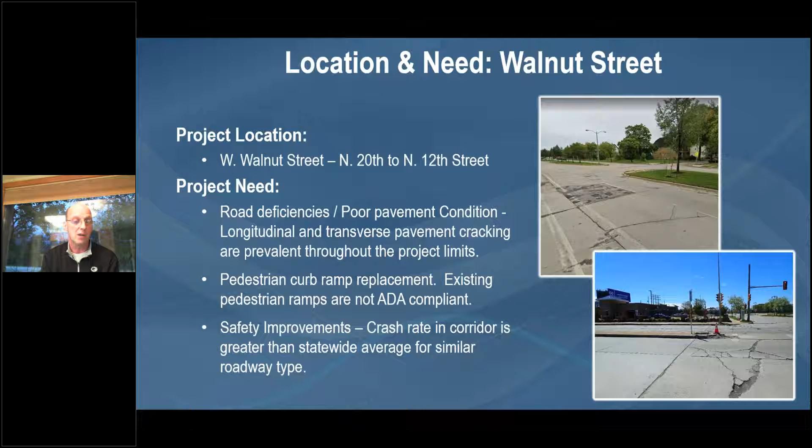One of the most important things about this project is incorporating some safety improvements. The crash rate in the corridor is greater than the statewide average for similar types of roadways.

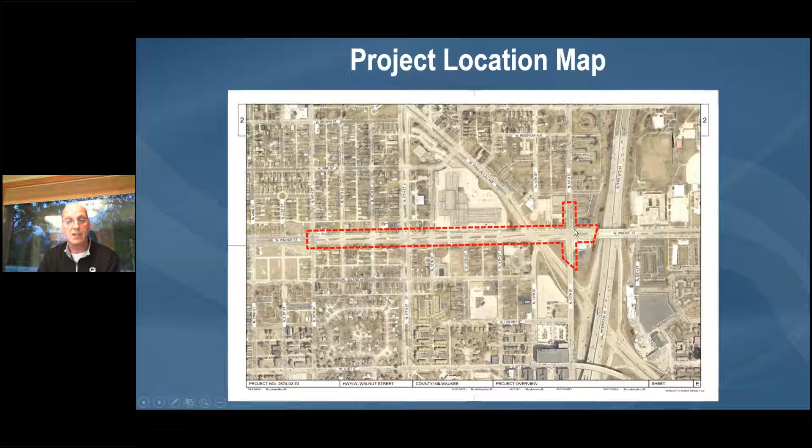The project location map here shows the limits. The project reconstruction is going to start on the east side of the 20th Street intersection and run east to the bridge over I-43. Primarily on the side roads, no improvements are being done - the roadway will be reconstructed to around the radius returns of those intersections. 12th Street, however, will have a portion reconstructed. On the south side of Walnut, it will extend down to the bridge that goes over West Fond du Lac Avenue. On the north side of Walnut along 12th Street, the project improvements will extend about 200 to 300 feet north to encompass the turn lanes at that signalized intersection.

I'd like to briefly go over some roadway data that's out there. The project length is about 0.6 miles, and the existing roadway is a 4-lane divided roadway with parking and bikes on both sides of the street. The roadway is classified as a minor arterial, which means it carries a decent amount of traffic. It has a posted speed limit of 30 miles an hour, and the traffic volumes vary. West of Fond du Lac, the traffic volumes are 12,600 vehicles per day, increasing to 16,300 vehicles per day east of Fond du Lac Avenue.

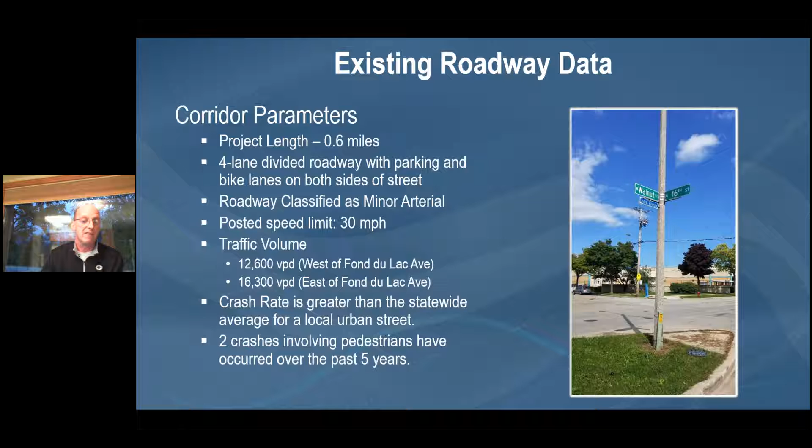As I mentioned, safety is a big concern of the city. The crash rate out there is greater than the statewide average, and there have been some crashes that have involved pedestrians over the past 5 years.

Graphically, this is what the existing typical section looks like. As you can see, we have two 11-foot lanes of through traffic in each direction, with a 5-foot striped bike lane and 7-foot parking lanes on both sides of the street. The two directions are separated by a 26-foot wide median, and we have 8 to 10-foot grass terraces between the outside of the road to the existing sidewalk.

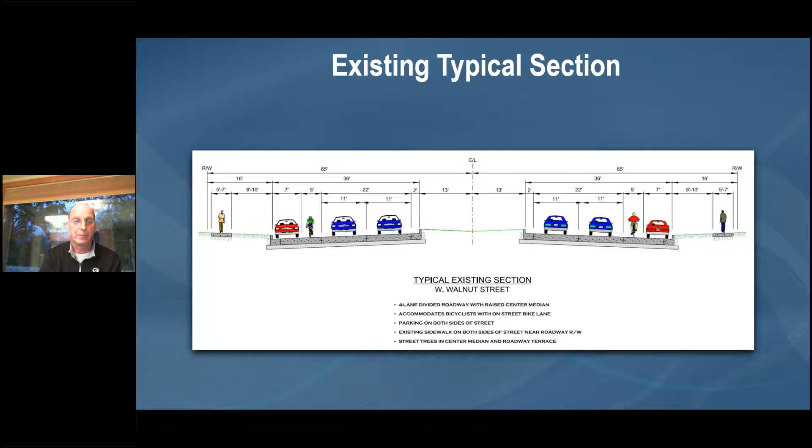Some of the proposed improvements for this project will include the complete reconstruction of the roadway. The city currently proposes to reconstruct Walnut as a 2-lane divided roadway west of Fond du Lac Avenue and maintain the 4-lane divided section east of Fond du Lac Avenue. This is directly related to the traffic volumes experienced out there today and forecasted for the future. As mentioned, we'll replace some pedestrian curb ramps and perform spot sidewalk improvements.

Any sidewalk that is damaged or faulted will be improved as part of this project. In a couple of the later slides, we are proposing to close some mid-block median closures, primarily at the alleys. This will also increase safety by reducing the number of access points within the project corridor. Other improvements include new signing, pavement marking, and street lighting.

Traffic signals will be replaced at 3 intersections, as shown here on that slide. As far as storm sewer, the trunk line, or storm sewer main line, is proposed to remain in place. However, we will be replacing the storm sewer inlets and lateral pipes within the project corridor. Another important feature of this project that the city wishes to include is the incorporation of stormwater management features, as well as traffic calming measures in the project limits.

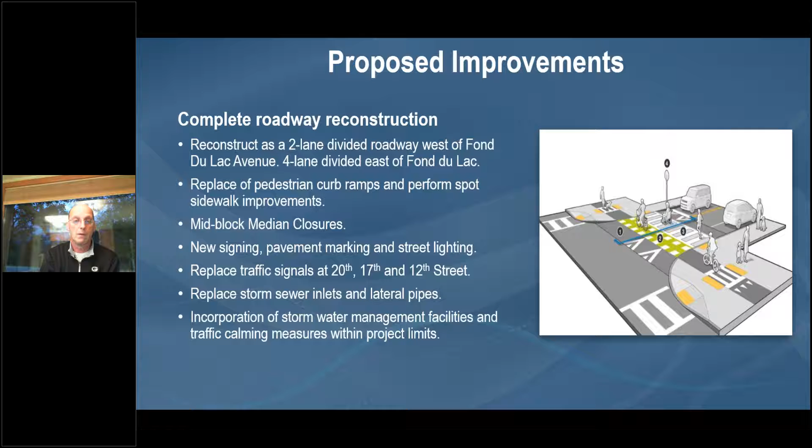For that 2-lane section on the west side of the project, we've developed 2 alternatives under consideration. The first is a 2-lane alternative with off-street bikes, shown on the top portion of this slide. It includes one 11-foot lane in each direction, as well as a parking lane on both sides of the street. As you'll see in the overview on the next slide, parking will be somewhat reduced in the project corridor, and we're definitely looking for feedback in that regard as part of this presentation tonight.

The bike paths would be provided on both sides of the street, taking them off the roadway itself, centered between the new curb line and the existing sidewalk, as shown. Alternate 2 is the 2-lane option with keeping bikes on the street. This provides an 11-foot lane in each direction, a 5-foot bike lane on the road, as well as parking.

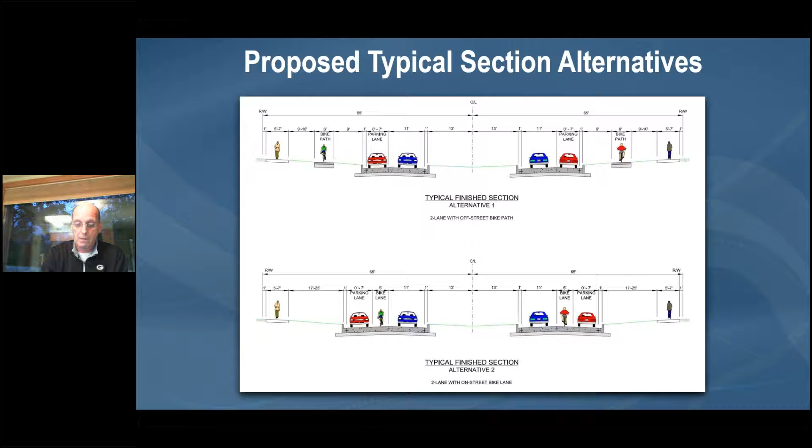So just an overview of alternate 1 with the off-road bikes, you can kind of depict it here, and I'll zoom in in a second. As I mentioned, we have traffic signals at 20th, 17th, Fond du Lac, and 12th. As part of this project, the signals at 12th, 17th, and 20th will be replaced.

As many of you are aware that are living or drive this corridor, there has been work at the Fond du Lac intersection to replace that signal this year. That signal will remain in place as part of this project; it won't be touched. Further, the intersection itself, the pavement within the intersection, is outside the scope of this project along Fond du Lac Avenue.

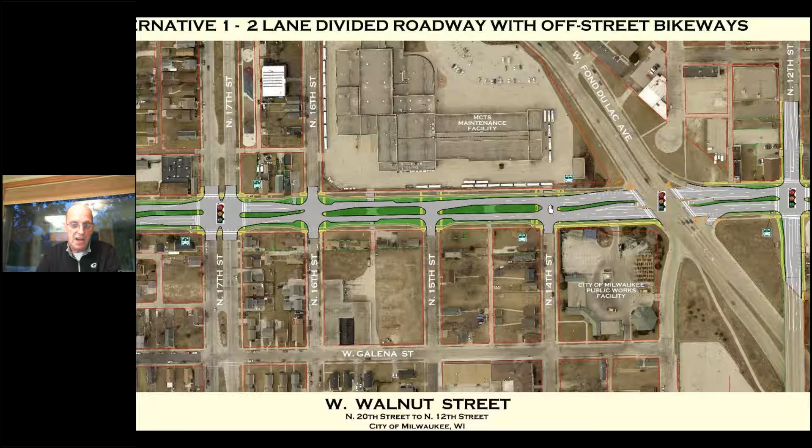If I zoom in here on the west end, you'll see that we'll take down the existing 4-lane section and it'll taper down to a 2-lane section between 20th and 19th Street. That 2-lane section will remain as we progress east, beyond 15th Street, where we'll start to widen back out to the 4-lane section once you hit 14th Street, and that 4-lane section will continue on to the bridge over I-43.

The primary reason for this is to provide acceptable levels of service through the intersection of Fond du Lac Avenue. In addition to the nearly 16,000, or over 16,000, vehicles traversing Walnut Street, Fond du Lac Avenue has over 20,000 vehicles per day, and the 4 lanes are needed at this particular location to make sure that intersection operates acceptably.

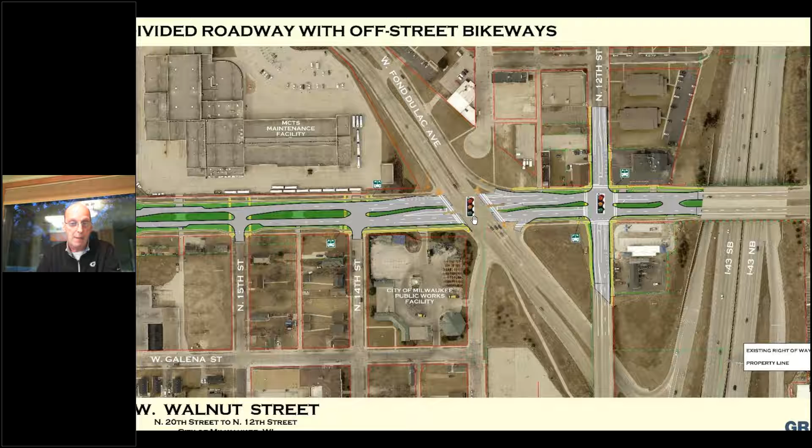I've zoomed in here on one of our plan sheets that shows the bike lane in a little more clarity. The off-road bike is highlighted in gray. In this situation, as the bike lane approaches the intersections, we'll push them out to be adjacent to the existing sidewalk, so the pedestrians and the bikers are crossing at nearly the same location adjacent to each other.

One thing you'll also notice, which I'll touch on a little later in the presentation, is that the city wishes to incorporate bump outs into the project, as you can see here. For instance, you have one lane of traffic, parking here, and then a bump out at the intersections. The benefits of this are twofold: one, it reduces the amount of time pedestrians are exposed to live traffic by shortening the crossing distance; and two, it eliminates the potential of vehicular traffic using the parking lane to pass on the right through the intersection.

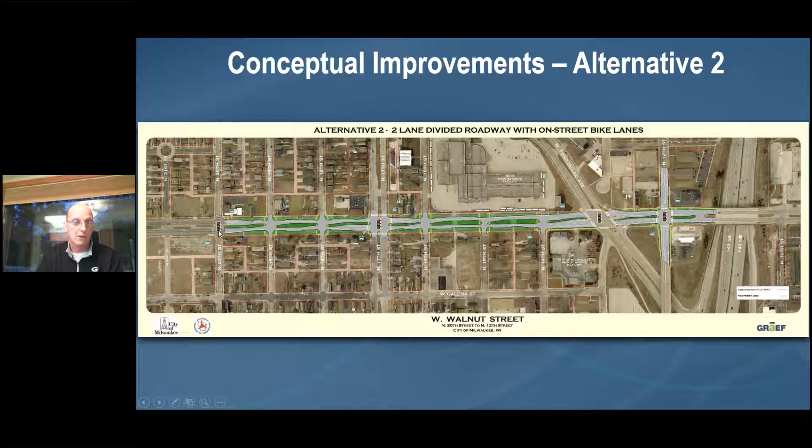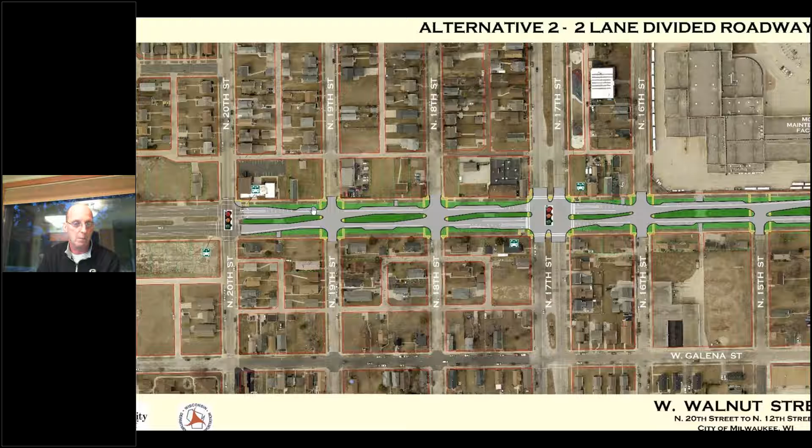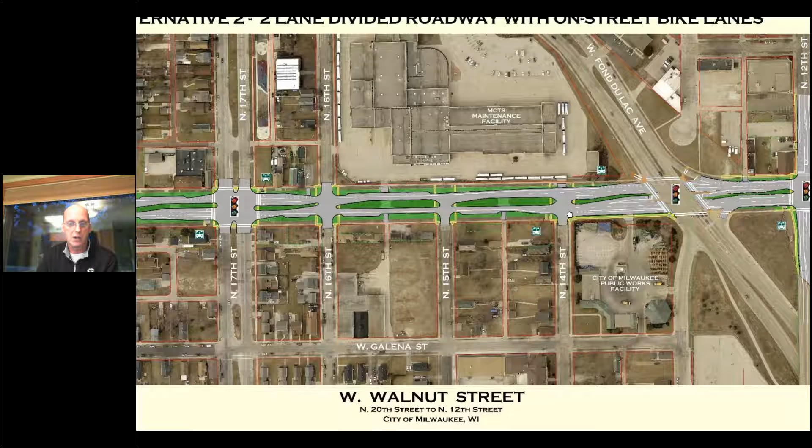For alternate 2, which is the on-street bikes, similar to alternate 1, we'd be reducing from the 4-lane section west of 20th Street down to 2 lanes by the time we get to 19th Street. That too is carried through just beyond 15th Street.

We're widened back out to the 4-lane section east of 14th Street. As I mentioned, improvements on 12th Street will run both north and south of Walnut, and most of the other side streets, the improvements are going to end just beyond the radius return.

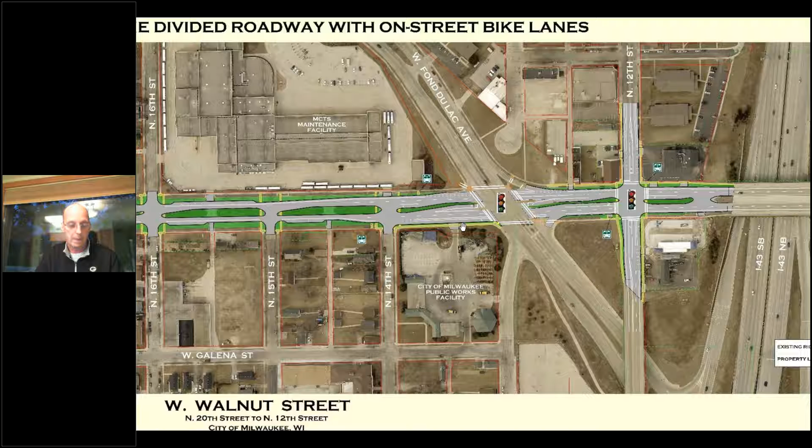Here too is just a zoomed in area of alternate 2. What we see here is the one through lane. We have a bike lane that's sandwiched between the through lane and the parking lane on both sides of the road. Bump outs would be provided in this option as well.

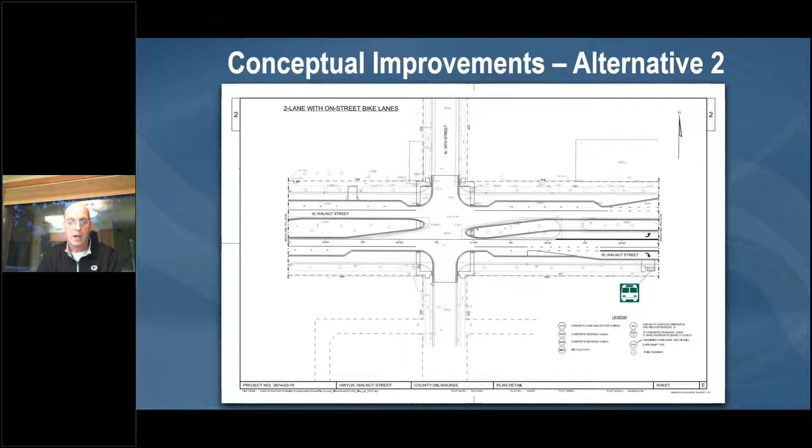One other thing of note is we will be coordinating with Milwaukee County Transit. There are several bus stops throughout the project limits. Once a preferred alternative is selected, we'll work with MCTS to determine what, if any, improvements they would like to see out in the corridor, and if there will be any changes to bus stop locations.

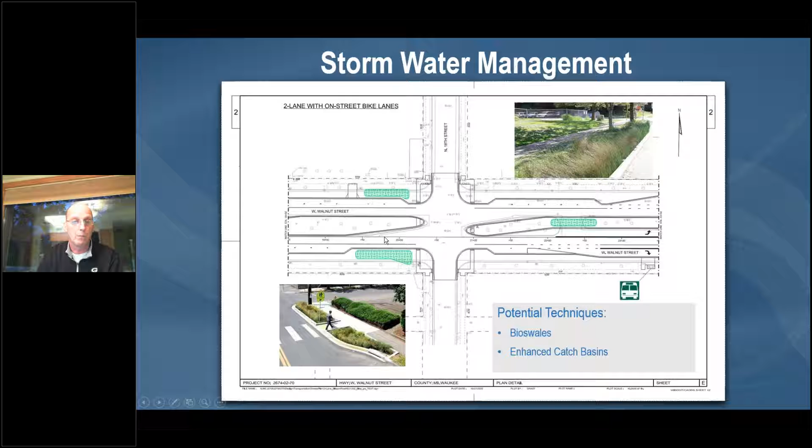What this ultimately does is create a speed hump, which will dictate that vehicular traffic will slow down as they're going in and out of this intersection, thereby increasing pedestrian safety as they cross these side roads. Additionally, bump outs, as I mentioned before, will be installed. It reduces the pedestrian crossings and prevents the passing on the right.

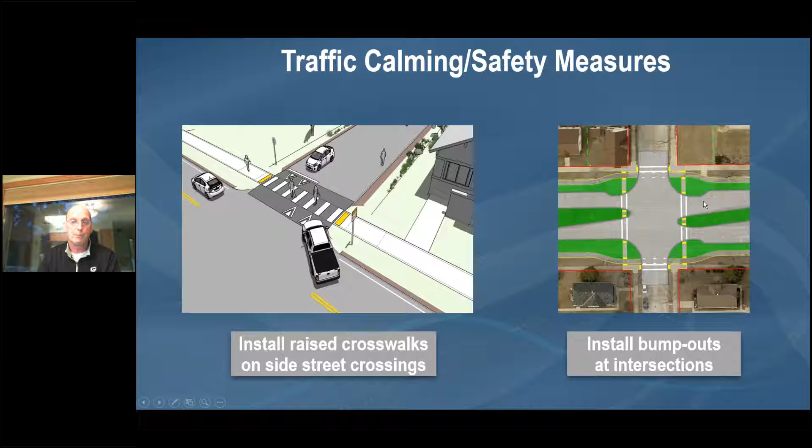The overall project schedule: we are about halfway through our preliminary design as we develop these conceptual alternatives. We're here at the first presentation tonight. The preliminary design is going to extend through late spring or early summer of 2021.

At that time, based on feedback that we get from the public and others, and working with the various groups within the City of Milwaukee and the Department of City Development, we will develop a preferred alternate by the summer of 2021. At that time, we will hold a second public involvement meeting to present that information and begin our final design.

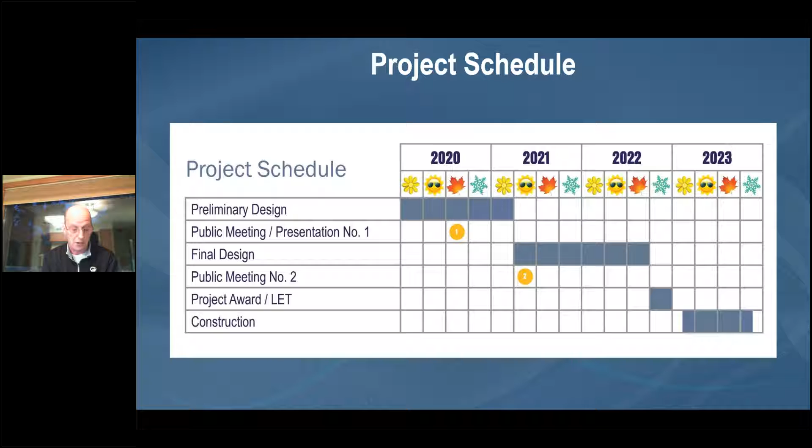Final design will extend through the fall of 2022, and the project will be awarded and let in the winter of 22, followed by construction in 2023. At this time, construction would be anticipated to start likely in early spring, most likely April, and run through most of the year, likely wrapping up in October or early November.

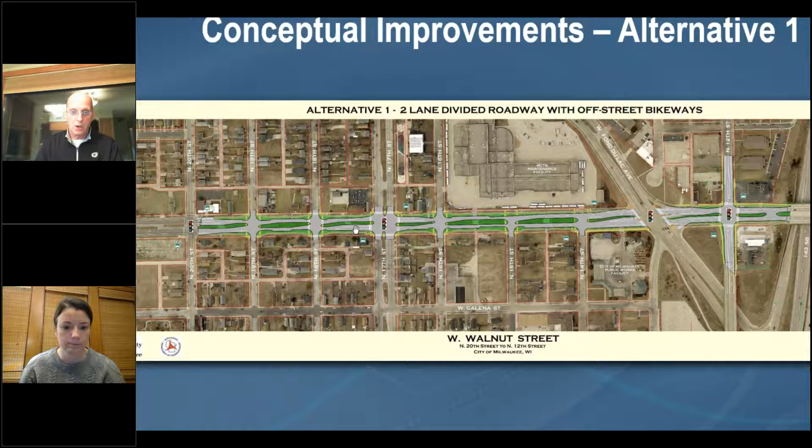At 17th and Walnut, I can go back in the presentation to show what that looks like — let me zoom in. This is alternative 1 with the off-street bikes. I apologize for not being able to get in even closer than this, but we will be narrowing slightly 17th Street across Walnut. However, right now we are not proposing bumping in or bumping out 17th Street itself. That's something we can definitely talk with the city about, to see if it could be added to the project scope. But it will narrow a bit going across Walnut itself — 17th Street width would remain the same.

Part of the reason for not doing the bump-outs at 17th Street is for truck turning radiuses — large trucks, especially fire trucks, need to make that turn without jumping a curb, and they usually take the major streets to get there. It's not as much of an issue on the side streets, but on larger streets like this we need to be able to get a larger truck through. That's shown on the exhibit here — you can see that taper, which allows a larger vehicle coming down 17th Street to make the turn and avoid hopping the new curb line. We can't narrow it as tight in these areas, but we do have bump-outs at the non-signalized cross streets.

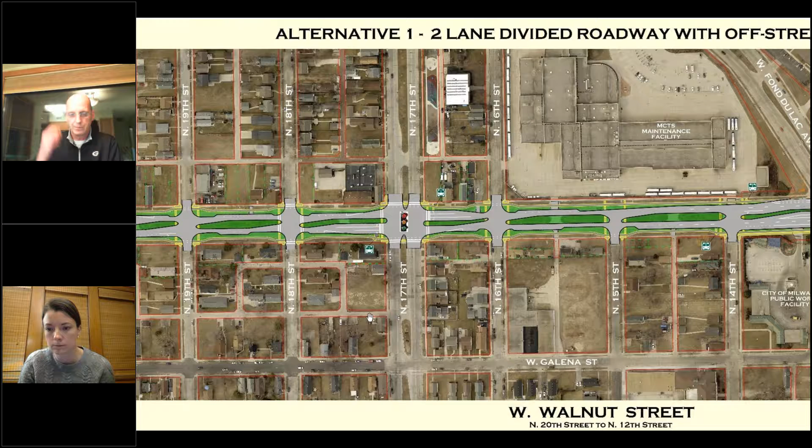Thank you for clarifying that.

He also added, thank you — those medians in the middle are very helpful as a pedestrian refuge. Will those be ADA accessible? Also, will there be audio-equipped crossing signals for visually impaired pedestrians and transit riders at 17th and Walnut? The median cut-throughs will be ADA compliant, so they will be accessible. As far as the audio signal, Scott, if you could speak to that — the city of Milwaukee is actually going to be performing the traffic signal design on this project, and I'm not exactly sure what specific features will be incorporated into the signal equipment.

Sure. So us at the city, we do have a number of accessible pedestrian signals that have been deployed citywide. Generally, we install these types of devices based on requests from the public. So if you are interested in submitting a formal request, we could certainly add this in and try to get this equipment installed with the project. So I can provide my email address in the chat box, hopefully if people can see. But yeah, I think that is something that the project could accommodate, would be a request for accessible pedestrian signals.

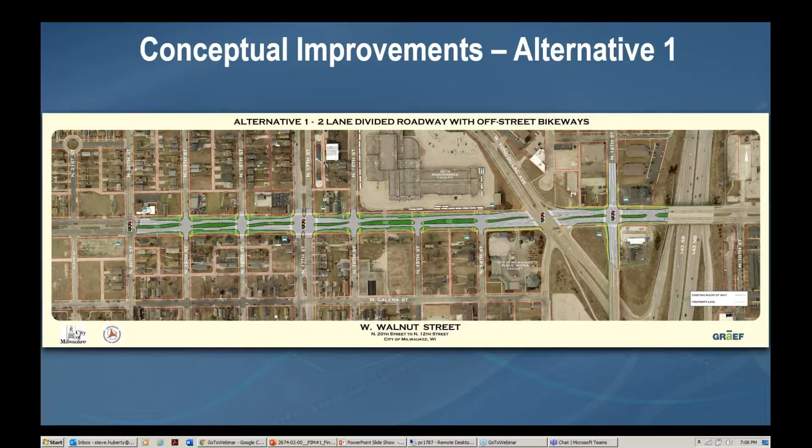One question I guess I have, and maybe Jeff knows the answer, for 14th Street. We do have a driveway to the maintenance facility. We've got driveways off of 16th Street as well. How often are some of those driveways being used directly onto Walnut from the maintenance facility, if you know? I think they're gated, if I recall correctly. Jeff, if you don't mind, I will try to unmute your microphone if you have an answer for that.

Yes. Hi there, guys. Hi, Jeff. Appreciate all the feedback. I don't know if my webcam can be enabled or not, but no big deal.

Yeah, no big deal. Not sure about the driveways. I can follow up with our maintenance department. I can't imagine those are used too frequently. But yeah, definitely all the feedback that we gave you on our bus stops, we'd be happy to talk that over and figure out what the best plan is. I mean, really from our side, it's all about the safety of our riders, and also the smooth operations of our buses, which in this corridor really isn't a problem because it's so wide. But any narrowing of it, we would love to be in conversations with you guys.

Definitely. And thanks to Scott, also I'll be emailing you. Yeah, thank you, Jeff. Funny, we were just emailing an hour ago. Well, two hours ago now.

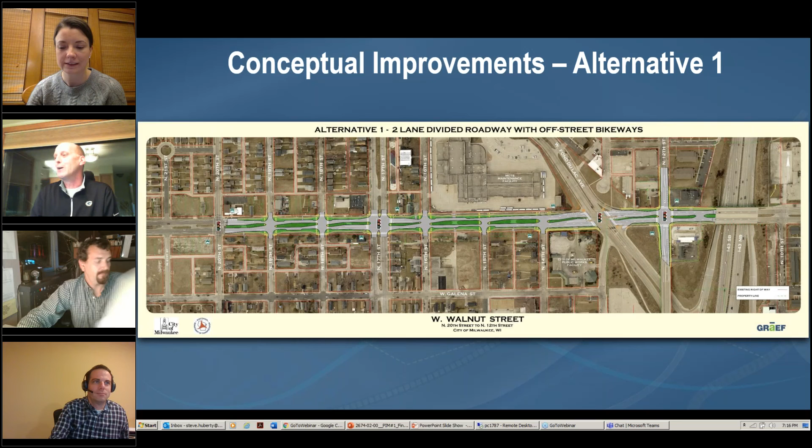It was nice to see such positive feedback from the public about narrowing the street. I was wondering how that was going to go, whether there was going to be people that were vocal the other way as well.